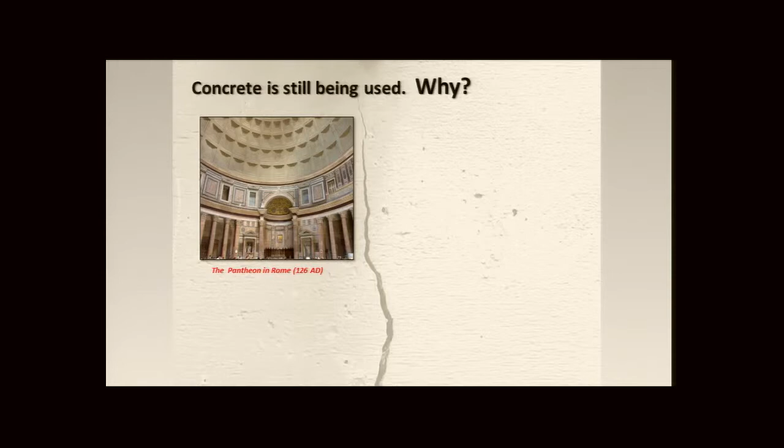But with development, structures became more complex in terms of the shape, the height, the structural frame. So there was a need for another material with maybe higher strength. So steel was a good alternative. During the last century, many of the buildings were built using steel. And the World Trade Center was one of the examples. Most of the structural elements were built using steel.

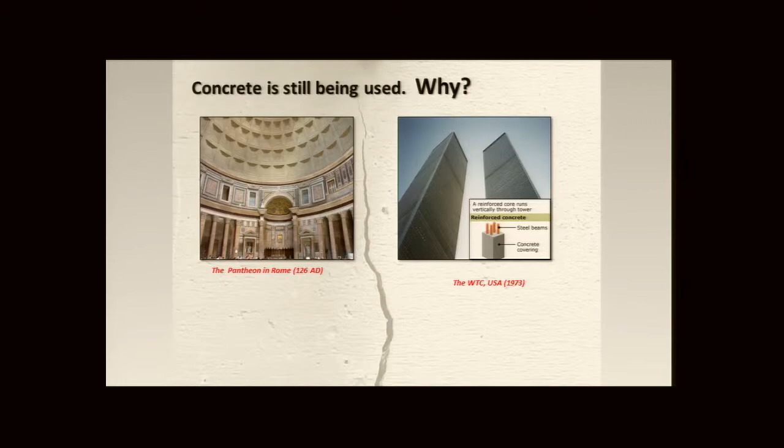But after the 11th of September attack, the behavior of steel under high temperature was questionable. Although there are many theories to explain the collapse, it is believed that the reinforced concrete core in the center of the twins played a vital role in postponing the collapse and saved thousands of lives. So this was the turning point, and this brought to attention how the properties of concrete are amazing, but we need to work on the drawbacks in concrete.

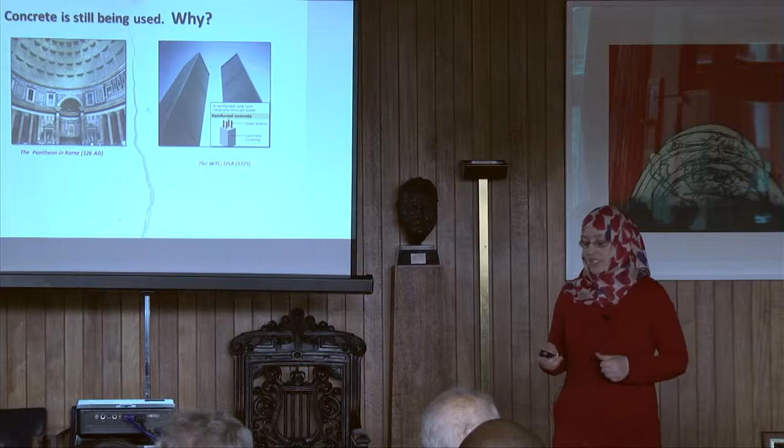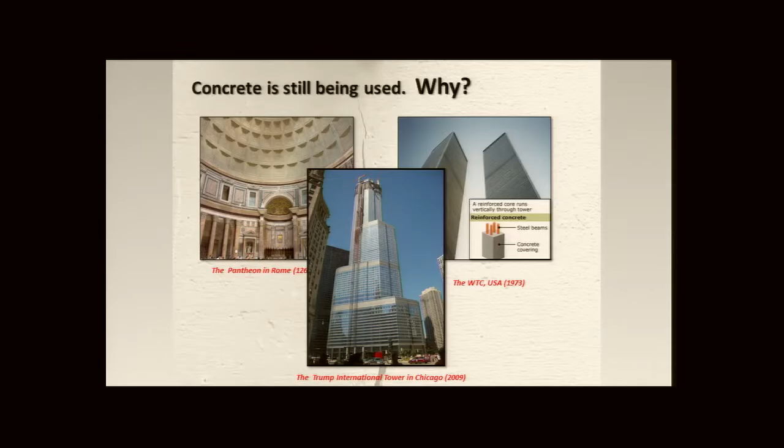Just one example is the Trump International Tower. The design before the attack was ready as a steel building, but immediately after the attack, it converted completely to be mainly concrete structures. So the last 10 years acted as a new era for concrete. Extensive research was done and is still being done.

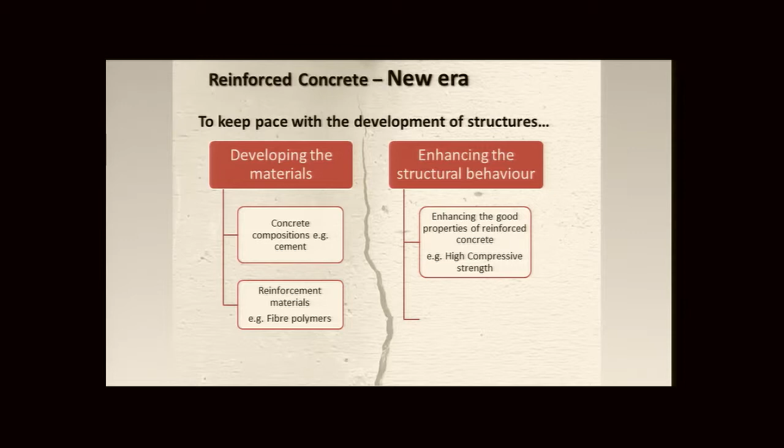We can distinguish between the different research in this area by saying that it can be divided broadly into two fields. Working on the material itself, like the composition, the cement as in the first presentation we had today, or the reinforcement steel we used, and working on the structural behavior. So in terms of structural behavior, enhancing the structural behavior, studying the shortcomings and trying to overcome the shortcomings in reinforced concrete structures like cracking. And actually, this is my field area.

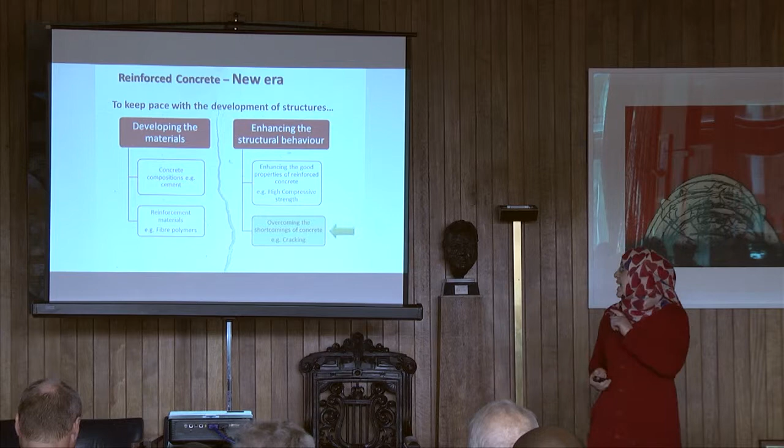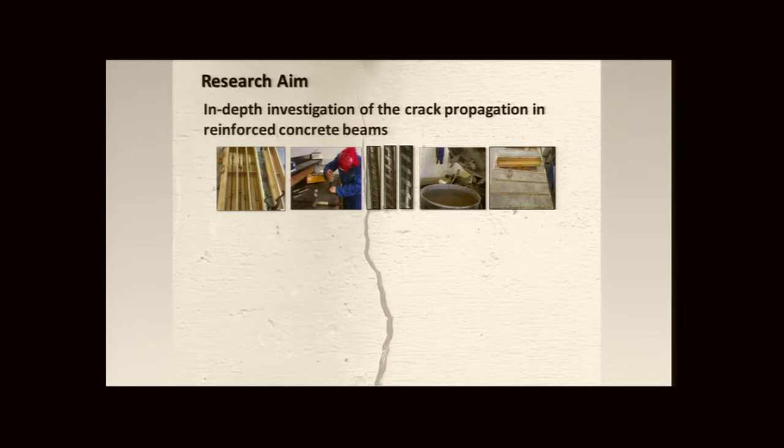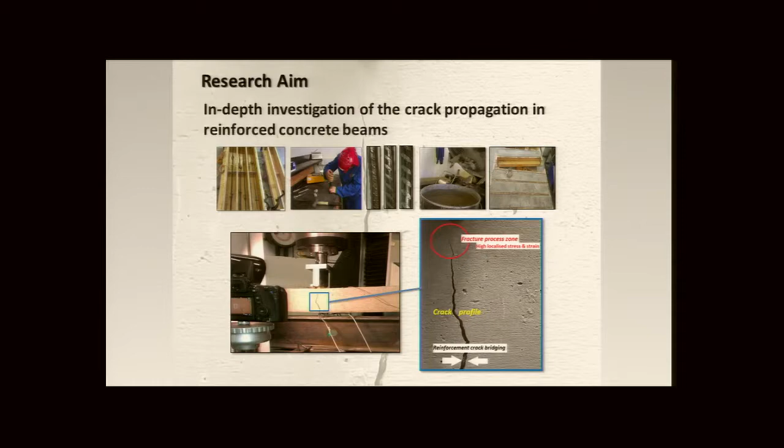So this takes us to my research aim, that I am studying the crack propagation in reinforced concrete structures. To do that, small-scale reinforced concrete beams were cast using different reinforcement ratios, different concrete mixes, and we tested them under loading to monitor the crack propagation. Why did we do that? Because we want to have a deep look at the cracks, study how the reinforcement below tries to bridge the crack while it propagates, and study the fracture process zone ahead of the crack tip, which is very critical in terms of the ability of the crack to propagate.

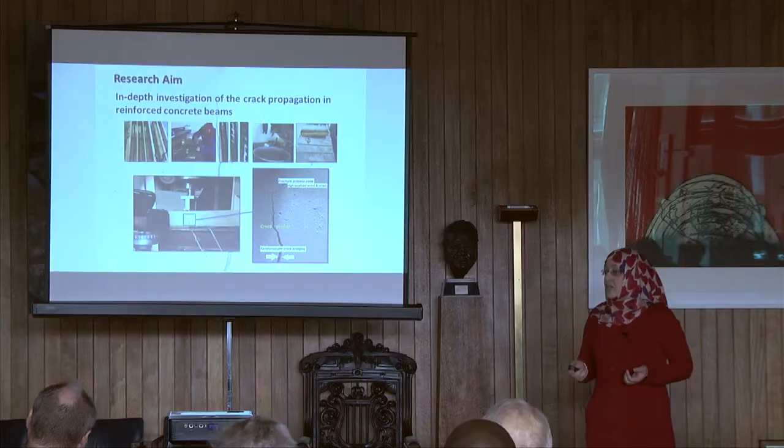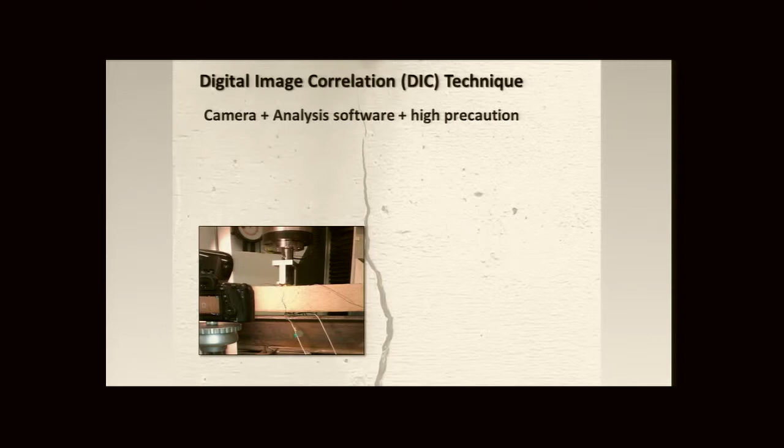But how did we do that? How can we monitor the crack? We use a simple technique. It is digital image correlation. Digital image correlation just needs a camera, analysis software, and high precaution in terms of light, stability, and other things. So the simple concept behind digital image correlation is that different images are taken under different loading conditions. And using some correlation algorithms, each pixel is tracked through the images.

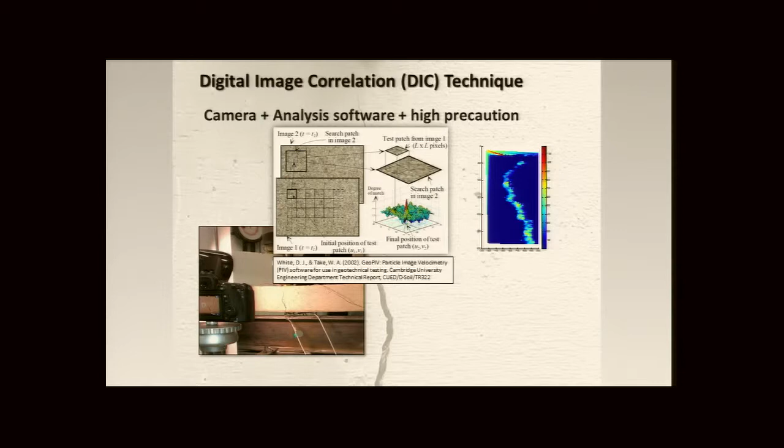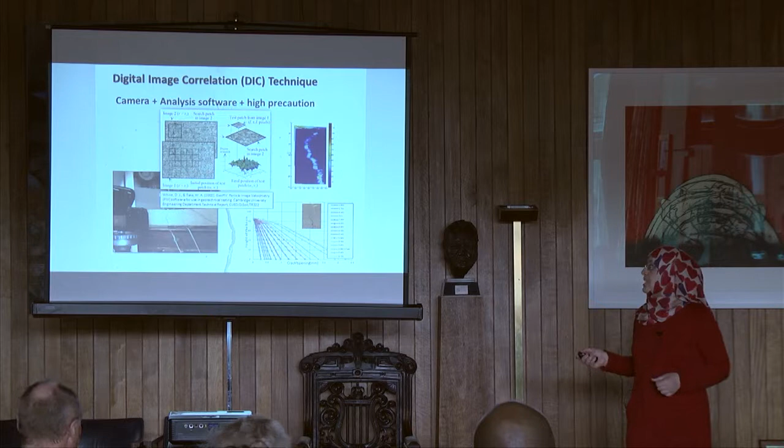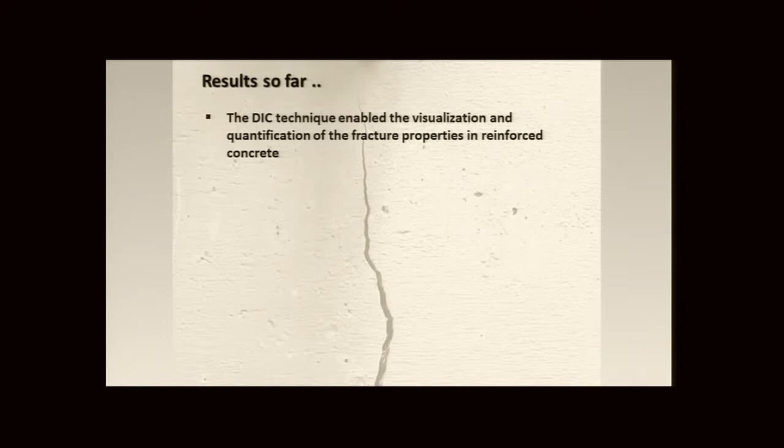And by this, we are able to construct full visualization of the crack, construct the strain profile around the crack, and also study how the crack develops in terms of the opening and the length with loading. So the results I got so far are that DIC seems to be very effective in terms of monitoring the crack, and if we work on this, we can use it as a technique to monitor cracks in bridges or other things.

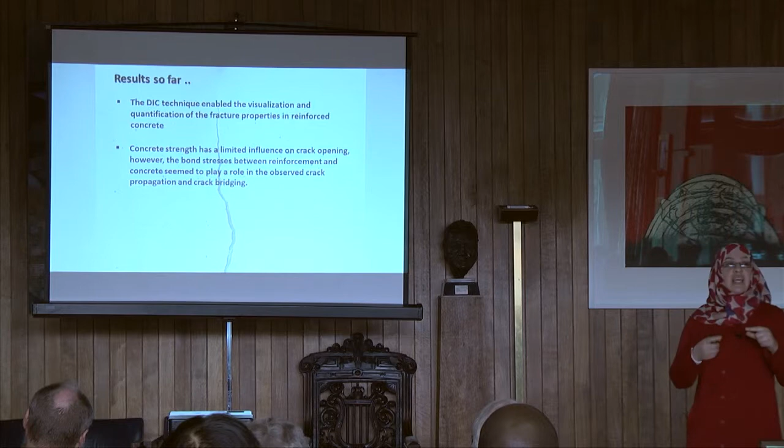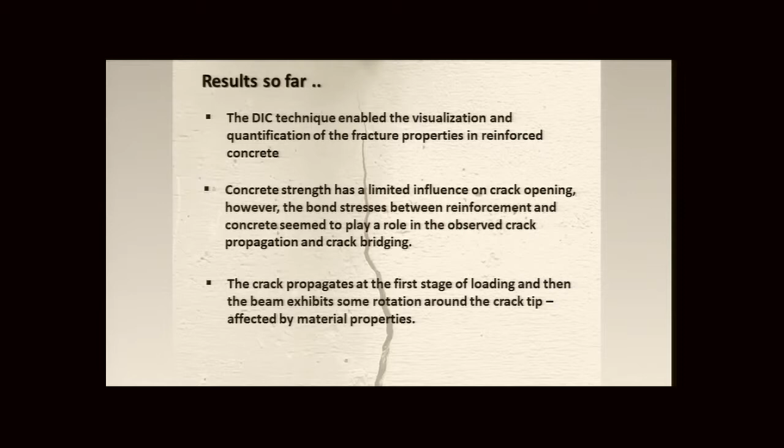And we found that the interface between the steel and the concrete plays a vital role in the crack propagation. And we found that the crack propagates at the beginning, so the width and the length increase. But after that, there is some rotation around the crack tip, which should be reflected in theoretical models and in design regulations. That's all, finally, without any cracks.